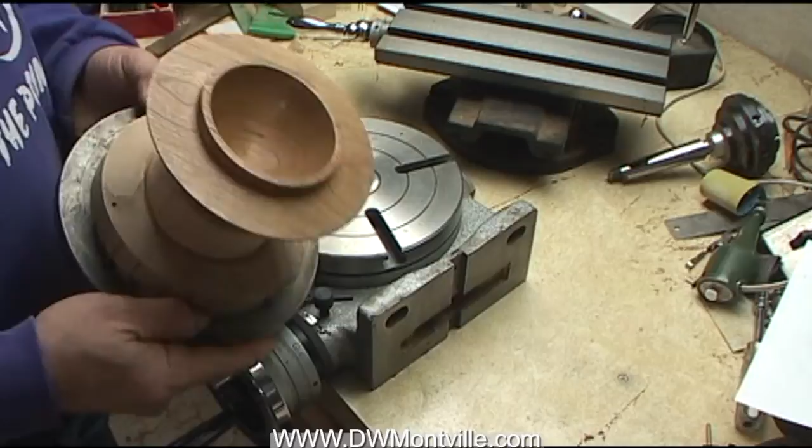I want to talk to you about rotary tables. I'm going to use one on my next project that I'm in the process of working on, and it's this right here. This is a bowl made out of cherry. I've got one coat of finish on it, and I've turned it with a thin ring, as you can see here.

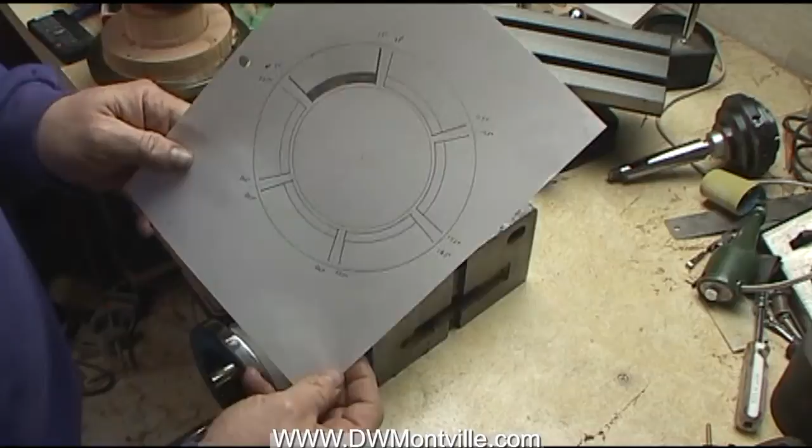That's going to get a particular carving done on it, and here's an outline of the carving. You can see that it's kind of geometric in detail. One of these has been blackened to really show the area that's going to be removed, so you can see I'm going to have these slots and this arc carved away. That's going to be done using a high-speed die grinder with a carbide burr in it.

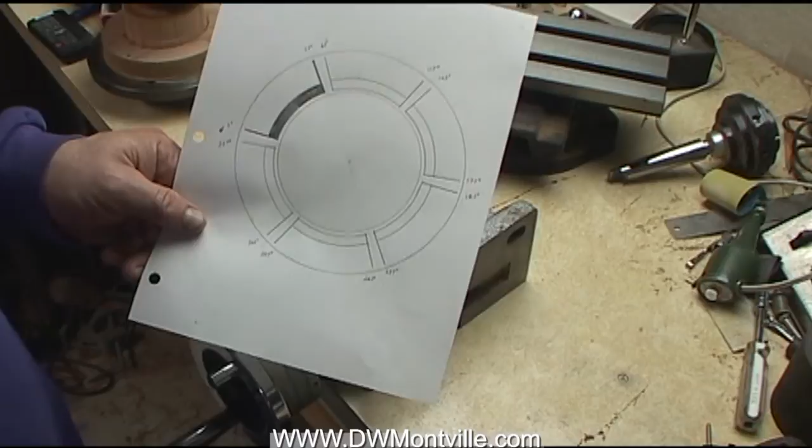Trying to do something like this by hand alone is pretty much impossible. You're trying to cut straight lines and very precise arcs in wood with different grain structures. So what I found is that if you use a rotary table in conjunction with a slide table, which I'll show you shortly, you can get those kinds of things done very nicely.

A rotary table is, as the name implies, a table that rotates, but it does so very precisely, very accurately, and very rigidly. Typically machinists use these on mills and such to do precise spacing of holes, things like that. You can also leave the tool engaged and rotate it, which is how I'm going to use it.

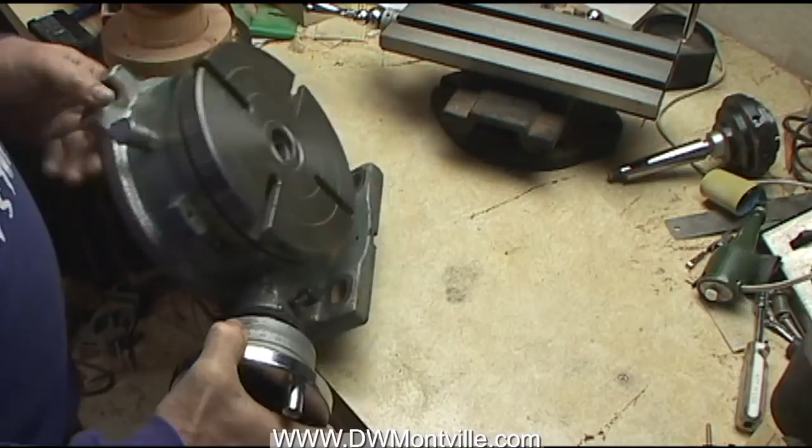These are fairly heavy. This one's probably about 40 pounds or so, maybe a little more. This one also allows you to tip it up, as you can see there, which would be handy. You can imagine if you have a bowl out here, you can do side work on it. Or laid down, is the way I'm going to use it next.

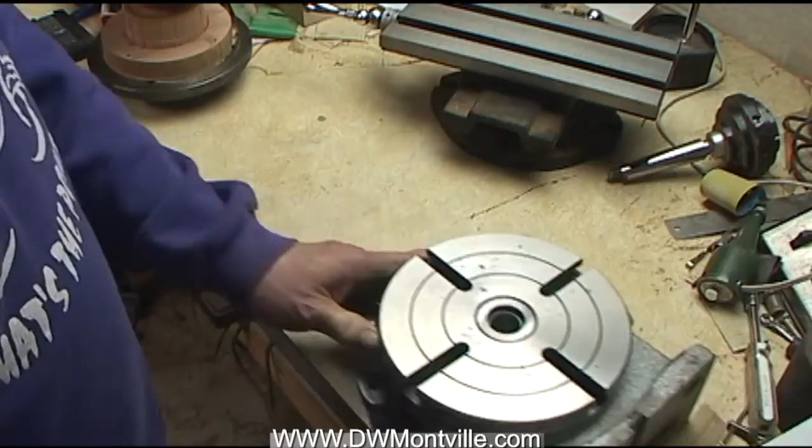Now, as you can see, I'm going to cut these arcs, and these arcs are very well suited to using a rotary table. However, these straight lines, the table only rotates. So what I'll do is put the table on top of a cross slide table, which is this.

This guy allows you, as you can see, to move linear dimensions one way or the other way. It'll also rotate, traverse this way too. So if I have the rotary table mounted on the cross slide, then I have rotation and linear motion available to me. How you set it up, of course, determines what you're going to end up with.

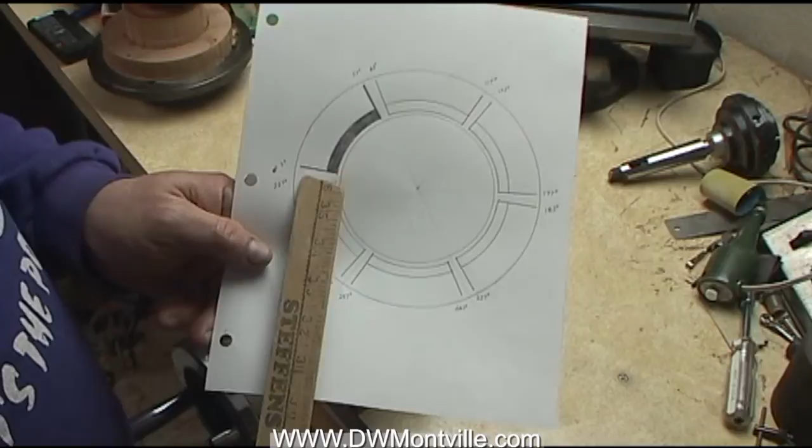As you can see here, I've laid this out such that I have 0 degrees, and then as it turns out, this line here, to give me the spacing that I want, comes out at 6 degrees, then 57, that's cutting the arc, then the next jump to 63, and on around. You do want to lay something like this out first before you start, otherwise you'll get totally confused. And I've learned that from experience.

So, once you have the rotary table, and you have something like this, you can see you have T-slots in here for mounting, but this doesn't really conveniently adapt to that. So what I've done is I've created a little adapter plate.

This here is turned out of just yellow pine that I had laying around. It will fit on the rotary table, and then this will fit nicely into the adapter plate. These screws here just jam in there and hold it in place. You can see that you do have to be careful when you do something like this so that the screw, if you use this method, doesn't hit any place and allows you to get 360 degrees of rotation.

You can also make an adapter plate like this, which would engage these T-slots so that they would be hidden here. So again, it's how you do it. Doesn't matter all that much. It's just that you maintain the concentricity to the table with your piece.

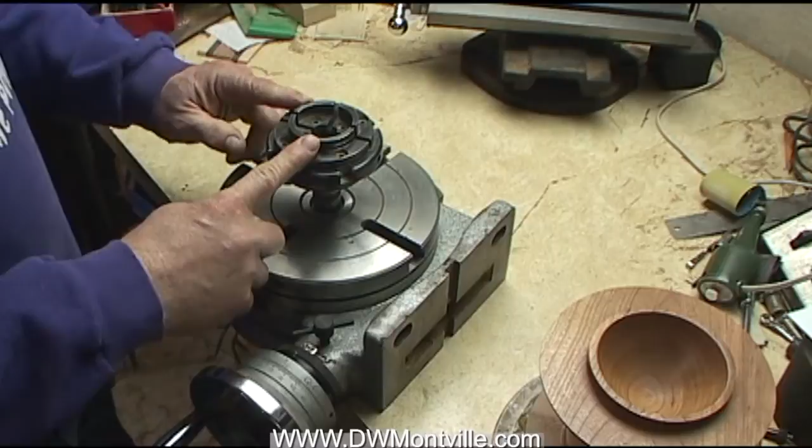If you have small pieces, you can use your scroll chuck from your lathe and position it any place you want.

That's about what I wanted to show you. The next thing I'm going to do is build all this up on my drill press with my high-speed die grinder, and we'll go ahead and cut some of these details on there, and you'll see how that all works. That'll probably be in another video, because I got a little work to do before I get to that point. Thank you for watching.